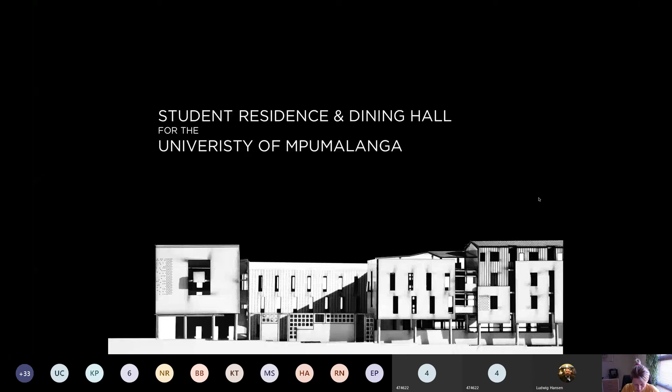Today, however, I'm going to talk about a project that I've been involved with for about 2 years at the office, and it was the design and the implementation of a student residence and dining hall for the University of Mpumalanga at the Mbombela campus in Nelspruit. It required the design of a 200-bed student res and a 700-seater dining hall at the university.

And for those of you who aren't familiar, the University of Mpumalanga is one of two new universities that were opened in South Africa in 2013, if I'm not mistaken, in the only two provinces that did not yet have a university of their own. The other university is Sol Plaatje University in Kimberley in the Northern Cape, and the main campus for the University of Mpumalanga is the Mbombela campus in Nelspruit.

So what you see in front of you is the Urban Design Framework Plan. Ludwig Hansen Architects and Urban Designers was appointed, amongst other things, to design the spatial framework with various implementation strategies to get these universities off the ground. The main campus is made up of a lower campus, a south campus, the hill campus, and an orchard campus.

The first phase of development for the university focused on the lower campus, which has, over a very small span of 6 years, seen the first phase of the university transform what was once the former Lowveld College of Agriculture into a university campus, which provides tuition and living arrangements for more than 2,000 students and is still growing.

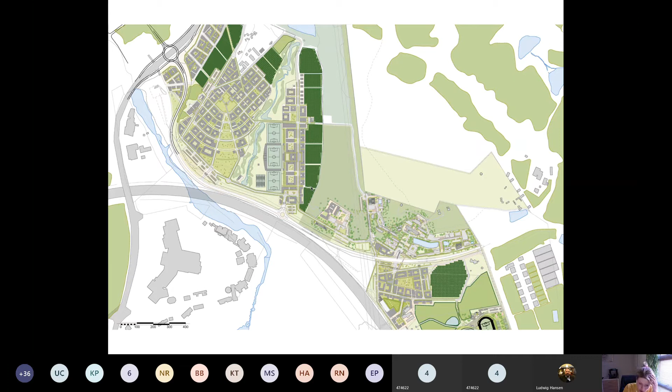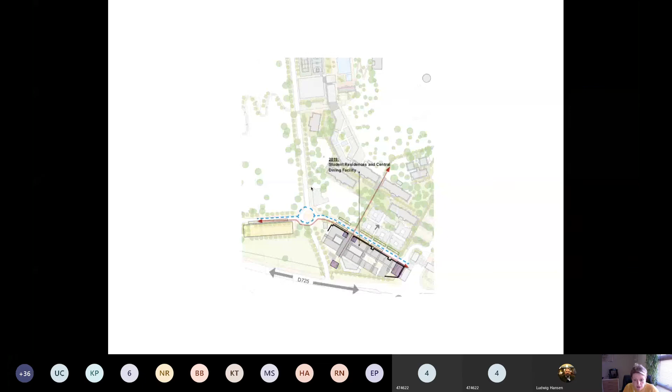The spatial development framework furthermore considers scale, so it works from the macro vision plan, which is the larger vision that spans over a much longer period of time, down to the meso, which considers the relationship that each proposed building will have with the greater campus and the open space in between. It also considers the micro considerations, the material palette and the type of brick to be used, and even the mortar joints that this brick needs to be bedded in. So I was really excited about being able to design a building into a framework like that.

The spatial development framework ultimately set the scene for us to consider what the purpose is of this building beyond the functional requirements of the brief as a student residence and a dining hall. If you think of a university campus as a small functioning city in its own right, every type of building has its part to play. The student res and the dining hall fulfills a vital part of this city-like structure. It becomes a home away from home for students embarking on their studies for a number of years. It is the space where living, informal learning, and socializing will take place outside of the formal academic program.

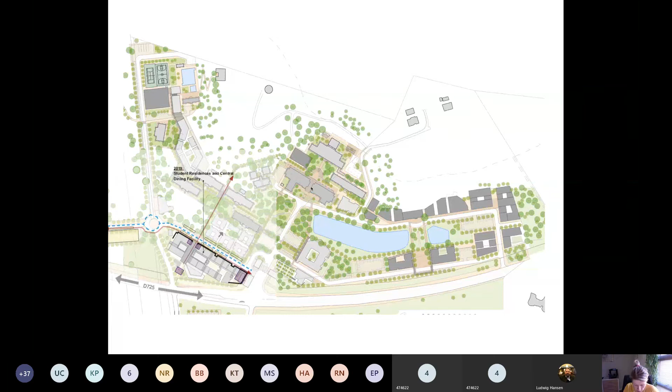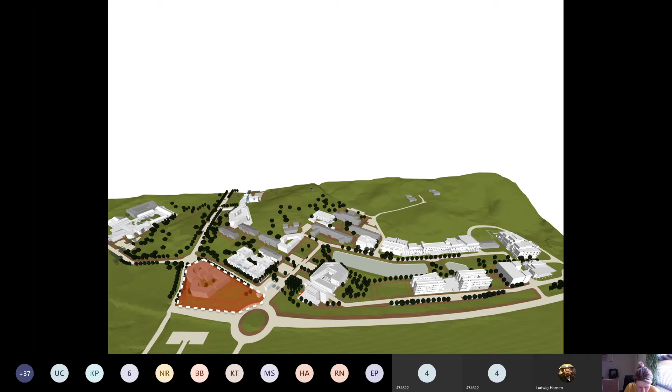This human element of the building was a really exciting prospect for me, and we worked with it a lot in developing the building. So this understanding of the social obligations of the type of building that had to be made ultimately became one of the key influences for the design of the student res and dining hall. We set out to design a building that was focused around creating as much communal and social space that could enhance the campus life as possible, which sounds like quite a public building.

But if you think about it, your bedroom, your bathroom, and your eating arrangements are some of the most private and intimate spaces you occupy. So essentially, we set out to design a building that is made up of mostly private program with an intent to foster the best possible public space. This, from the onset of the project, raised an awareness around the importance of thresholds and the gradation of access from public to private.

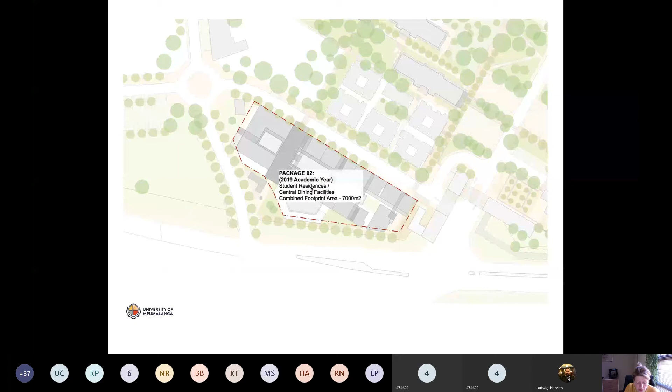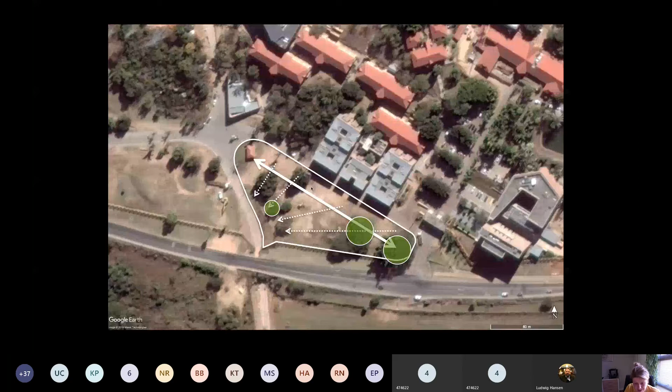So looking again at the site, just practically, there were several challenges and considerations around the site. It was a vacant site, but the first was the elongated shape of the land parcel, being just over 150 meters long, which is quite a long piece of land. Secondly, the fall of the land, which ran perpendicular to the length of the site. And there were a number of beautiful and well-established protected tree species on site that we had to retain. And this significantly reduced the development footprints on site and how we could lay out the building.

The site was very much exposed and has a strong visual presence along the D725, which is this road curling on the southern edge of the site, and the N4 further south, as well as a 40-meter road reserve, which delineated the limitations of construction of the building. So these were all the almost givens when we arrived with the site and the brief.

As I've mentioned before, it's located west of the main university entrance, which sits on the east, with the Vice-Chancellor's offices just across the road from that. So it's quite a prominent building on the university facade. And on the northern edge was a main internal campus road that connects the lower campus to the Hill campus on the west, and across the road is a very established university residence designed by Cohen and Garson architects.

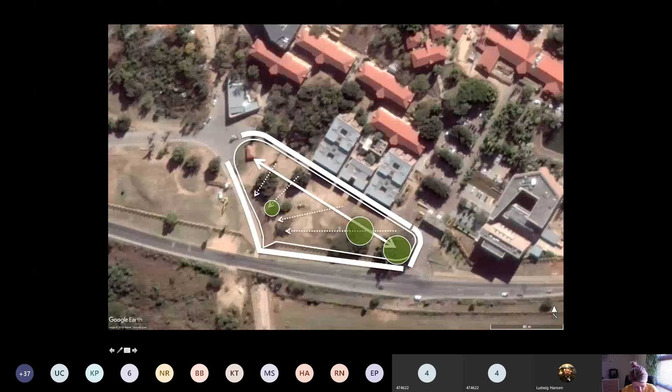So essentially, the building would not be afforded a backside. Here you can see the aerial view of the site while it was used as a contractor's yard, and you can take note of the entrance to the campus, the VC's office.

The topography already becomes quite clear, and the established trees on site you can take note of, which is something wonderful and quite unique about the campus in Nelspruit: it has a very lush and green natural environment.

So speaking to some of the thinking behind the lecture series, just to speak a bit about the design methodology, we decided to treat the site as a mass from which we would carve out a building. The solid would contain the functional program, and the void would eventually contain the social program. First, we responded to the urban axis lines as guided by the urban design framework. And then we split the elongated mass of the site into smaller, more manageable blocks for development.

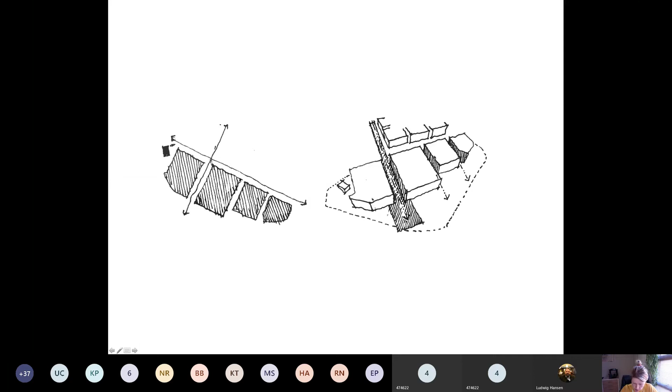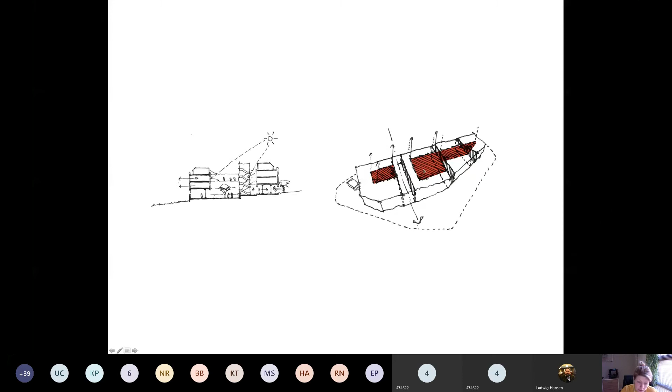We then functionally had to reduce these massing blocks into more slender perimeter floor plates that can accommodate the functional planning of a student res and a room arrangement, as well as providing adequate sunlight to all the rooms. By doing this, we created several courtyard voids that varied in intimacy and scale.

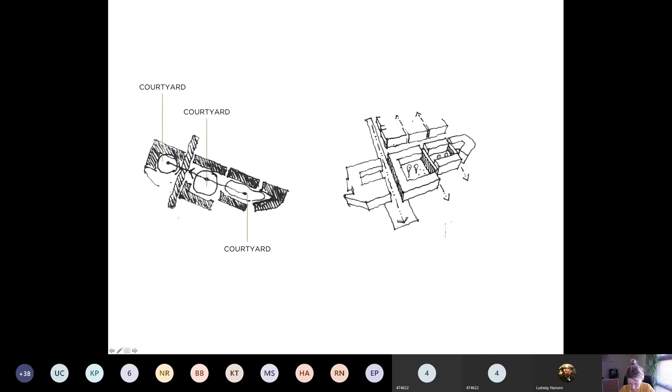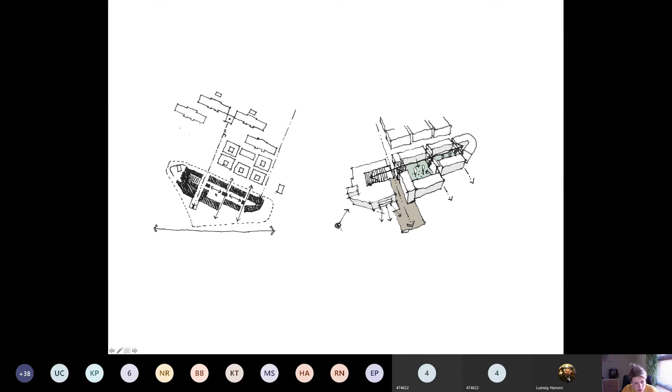So at this point already, we've taken what is a very simple building mass and we've used it as a threshold to the larger campus where open space becomes more contained. The perimeter blocks overlook the courtyards and the campus streets, and this improves the visibility and security of these open spaces that we created.

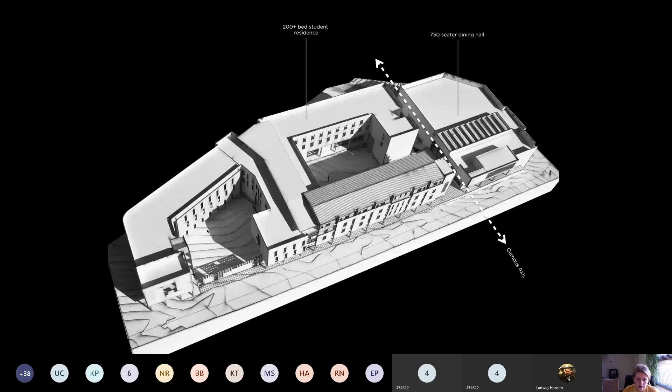So to the one side of the building lies an object-like mass, and this facilitated the most public program of the development, the student dining hall. And on the opposite side of this main urban or campus axis, we placed the student residence. The separation of the two programs was intentionally done, and the connection of all these spaces was done with a visual axis that links the building from east to west. So there's the dining hall, and this would be the student res component.

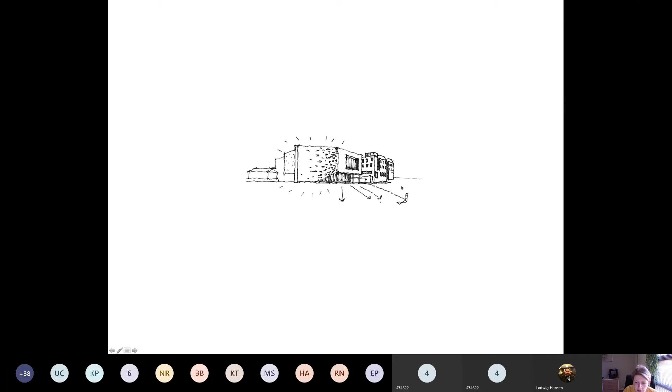In response to the vehicular movement that we saw earlier on the D725 road, the dining hall envelope responded with a singular gesture to create a building landmark. It's almost the first impression from a distance for vehicles approaching the campus. And thankfully, the inherent nature of the dining hall could accommodate single strong gestures. It had more freedom, unlike the rigor that you require functionally from that of a student res. So this is just at the onset of the project what we started imagining the space to be able to look like.

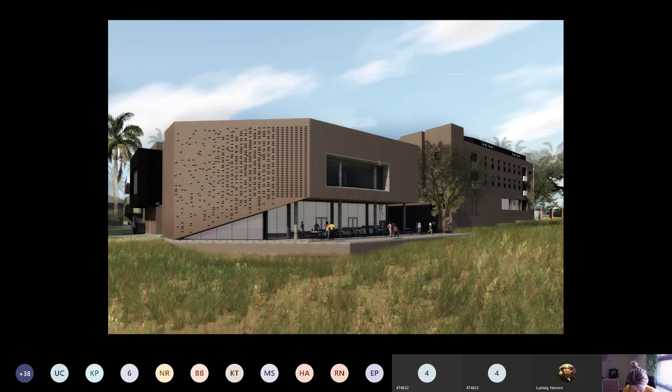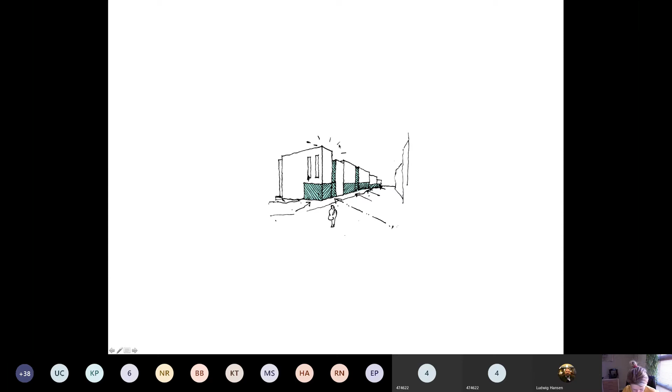And then on the inside northern internal edge of the campus, the building envelope responds more so to the pedestrian scale. It was intended to greet students and pedestrians on the ground level, while landmark features and corners respond to guidelines from the spatial development framework. Again, just starting to visualize what we had in mind at the onset of the project.

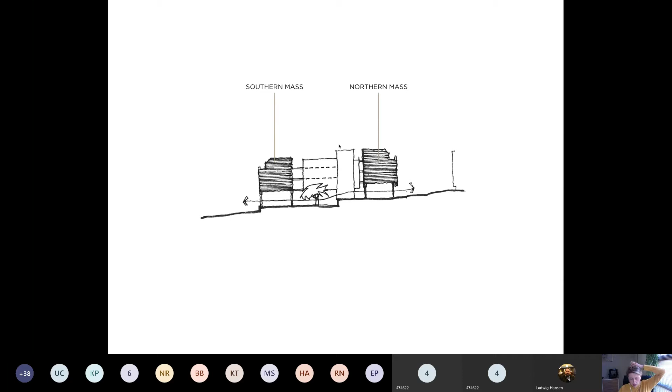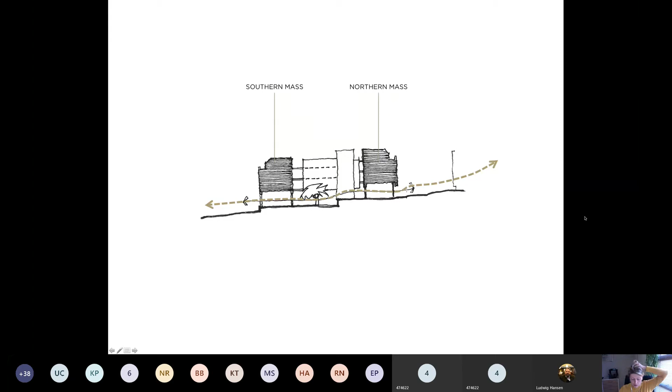Referring back again to the topography of the site and most of the sites on this campus, both the northern and the southern mass of the building was designed to be porous on the ground plane. The intention of that was to create a heightened pedestrian experience and create a raised awareness of the fall of the site. So it is a distinct feature of the hill topography of UMP, and instead of obstructing that and blocking it off, we wanted to really emphasize it.

Similarly, the mass, as you can see, of the dining hall was designed to have a transparency as well, from the internal street edge of the campus straight through the building to a framed view box to the view of Nelspruit.

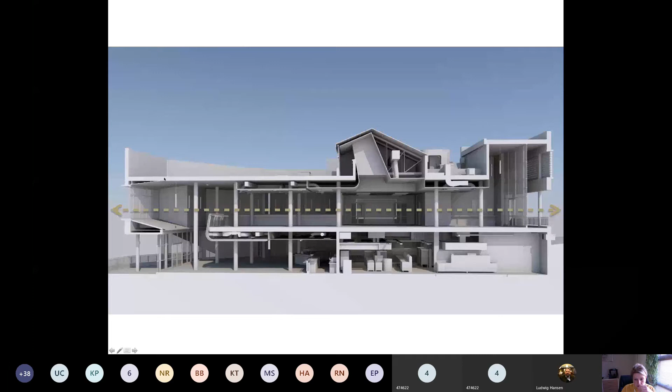So moving from massing to planning, the intention of the ground floor plan was to, as far as possible, locate all programs of shared or public nature on the ground floor, in such a way that it would bleed easily into the new courtyard spaces that we were proposing and the larger campus landscape. So this would include formal study spaces, as you can see on the northern edge, communal laundry rooms, and student lounges and breakout areas, to really create an almost unobstructed flow from internal space to external space, from public to semi-public to private.

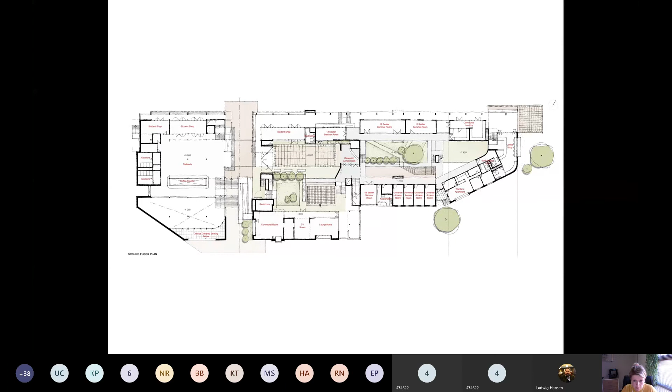And that was the intention from the onset of the project in terms of planning. The building elevation had to respond to the functional requirements of the student bedrooms, which created a lot of vertical articulation of the facade, which was intended to break what was essentially, as I said, collectively a 150 meter long elevation with the student res.

The depth of the facade, as well as the material difference, attempted to manage the scale of the building in the greater campus landscape. And the existing Marula tree that we had to retain actually became a celebrated landscape element that was cradled by the building and provided a softening element to the elevation and to the rigor that comes with planning a student res with the repetitive windows and the functional requirements of the space. So it also provided somewhat of a natural curtain to the rooms that surround the courtyard.

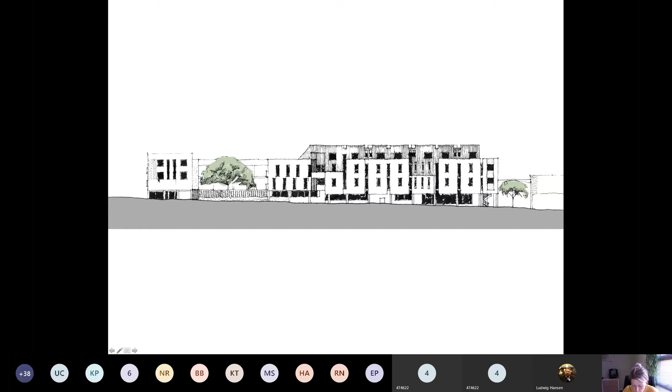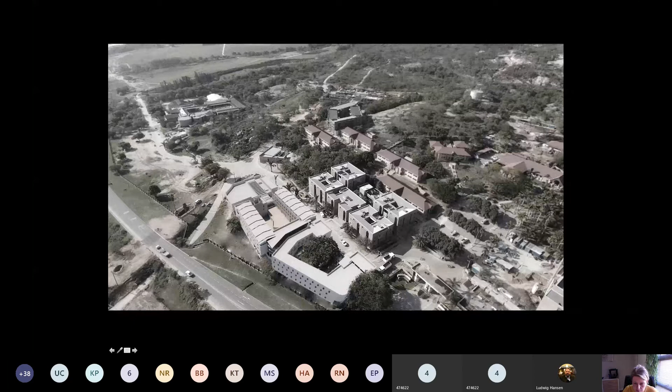Throughout the design process, we had to test the massing in relation to the campus fabric to see that it sits comfortably and it actually fits in.

And this is followed by a large courtyard which separates the campus public from students in the residence by means of a curved landscape wall and a change in level. I'll speak a bit more to that later, but this really becomes the forecourt to either entering the dining hall or the student residence.

This is where, yes? Sorry to interrupt. Just a question about this. So is this then the entrance to the campus as well? No, it's just the entrance into the building, not the campus. It's just the entrance into the building precinct. So once you're in the campus, it's a good question.

Students are encouraged to move freely throughout the campus, and it's then up to the buildings and the schemes themselves to filter students from public to private and to allow them in and out where they are allowed to be. So the dining hall should be used by students on a daily basis and should therefore be very accessible and quite public. And I say public in inverted commas because it's not truly public, it's public to the life of the campus. So once you are on campus, this is how you would enter.

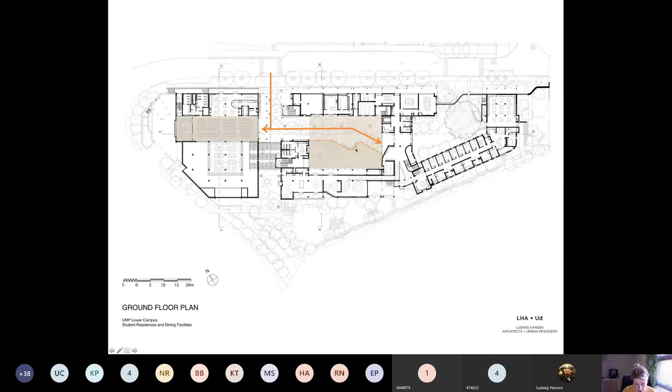And yeah, so the second courtyard becomes the forecourt to the main entrance of the student res. And this courtyard space is divided by means of a curved landscape wall, which separates the public space from the semi-private courtyard, which is only accessible by students in the res. All communal services are located around this courtyard. We've got provision for a bookshop, laundry rooms and drying rooms.

We've got seminar rooms that look out visually into the space. And on the southern edge, we've got all the student games rooms, TV rooms, and lounges also spilling out onto this courtyard space to really make it an active edge and an active open space. So when you move through the foyer of the residence, you come through into the Marula Courtyard, which is a soft courtyard and the most private court of the building, which is reserved for students who reside in the residence.

The Marula Courtyard is surrounded by a series of universal access rooms for students with physical impairments or disabilities, a large study space, and access to the warden's apartment, who oversees and looks after the students in the res. So the arrangement of the open space can be seen almost as one extended threshold that gradually filters the students from public to private.

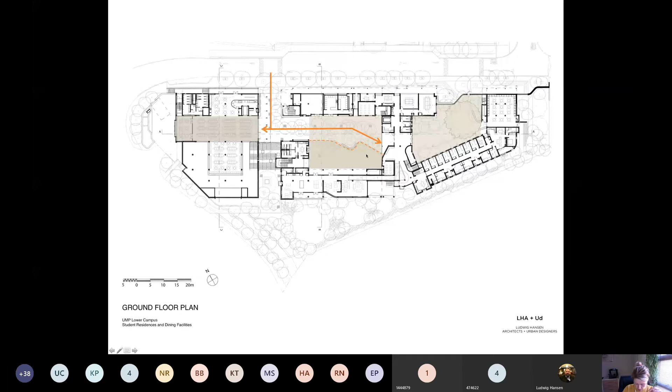Elements such as built-in benches, landscape benches, shelter from the harsh sun, which is a big thing in Nelspruit, and rain, as well as drinking fountains, are all placed in these areas to encourage students to gather outside and linger together.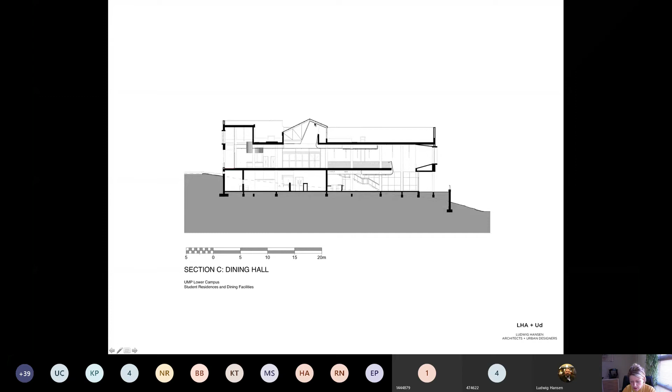And you also get an idea, because of the deep floor plates, we had to introduce a skylight that could bring in soft dappled light into the dining area. So some of the photos are still construction photos, some of them are more final photos, but they get the idea across. Here you can see once you enter into the dining hall, how you still get a strong sense of the axis line that moves east-west.

It terminates with an outside eating area that has a growing wall with a screen for planting to take on, as well as a skylight that filters the light quite softly into the space. On the north-south axis, the building's quite transparent, so you also, again, get a good appreciation and connectivity with the Nelspruit landscape and the campus landscape.

The outside eating area with the screening device, where we've included planting to grow up, because there was a small window in the afternoon where the afternoon sun would really pull in deeply into the building. So as this grows over, the space will become softer and you would feel more outside than as is now. This is looking back towards the student res.

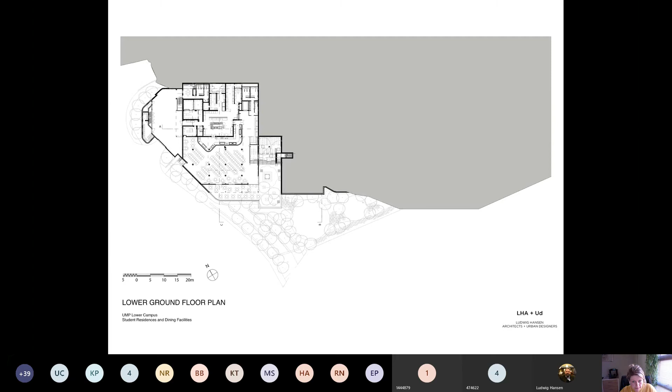So it's a heavily serviced kitchen that needs to contain refrigeration rooms, freezer rooms, fresh storage rooms, a service yard to access, weigh and clean all that material, and all of that needs to flow seamlessly through a kitchen that can then prepare and serve the students on the lower ground floor level. So looking out from the serving area out to where the students would sit down below.

And just to get an idea of how heavily serviced the back of house functioning is of a building of this nature, there's a lot of planning that goes into designing a kitchen that can cater for a single seating of 600 to 700 students at a time. Here you can see what the serving areas look like.

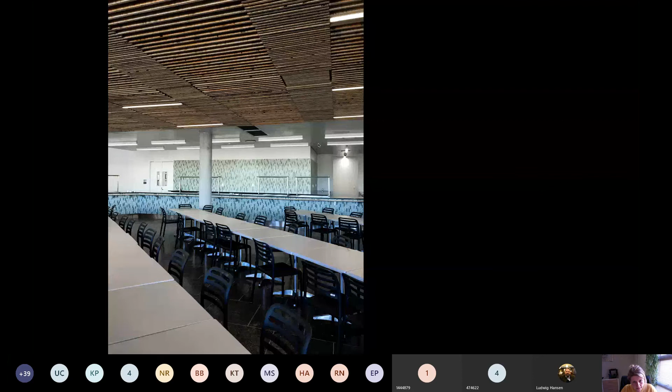And then looking at the external elevation of the building, the western elevation in the dining hall as a whole has much more of a sculptural envelope, and the western edge specifically has a sculptural edge which really brings to front the beauty that shadows and lines can create with the brickwork.

So it really gives you an opportunity to start playing with brickwork and walls and curvatures in such a way that you can appreciate the time of day and the vivid light that is inherent to the Nelspruit landscape.

So when you move back up to the main courtyard space from the lower ground level, you start to get more of a feel of the building material palette. The building material palettes for this building and all of the other buildings on campus are guided by a standard campus specification, which is set forward by the SDF.

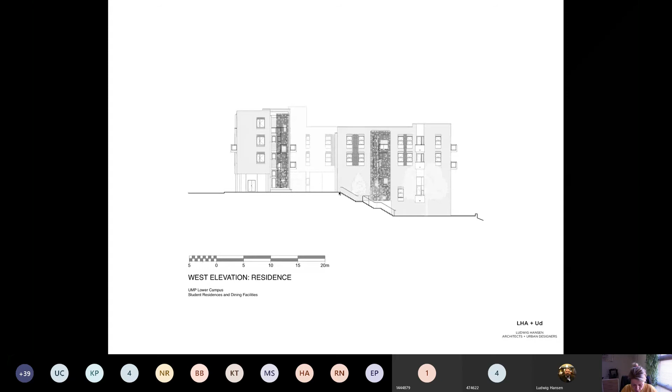And in this image, you can see the fire escape staircases we wrapped in a concrete breeze block with various opening sizes. So the way that we assign the materials to the building also becomes almost like a manageability map to the building. And it introduces a slightly more playful element to have you through these picture boxes almost.

So as you move down the axis, you move into the second courtyard. The second courtyard is the largest courtyard that you need to actually walk through to get to the main entrance of the residence building. So this was consciously done to improve the active nature of the space.

And here you can see how we've used the landscape as a structuring device to create a threshold that's a bit more subtle and gentle than just a wall or a palisade fence or a building, to separate students who reside in the res from students who are outside the res. So you can see the open nature of the ground floor plane in the main courtyard. Instead of using a solid high wall to separate the public space from the semi-private space, the change in landscape helped us in this way. It provided an opportunity to create a less imposing boundary.

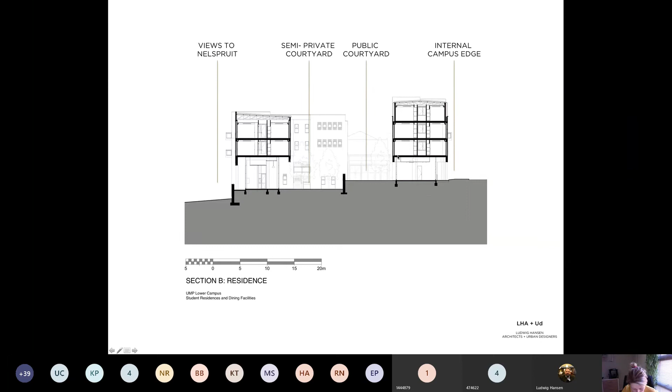The idea here is to create a courtyard that is an active open space where students from other residences and the broader campus can meet with students from this residence outside the confines of the rooms or the process of having to check in and sign in, and it really just becomes a spontaneous place where you can still meet and talk across a very open boundary.

The wall itself is quite low, especially from the approach of the building. And again, looking at how every element of this large structure has been designed to accommodate students or people at a pedestrian scale, the way that the wall turns into seating and it curves gently to soften the edge of the kind of large scale residence facade behind.

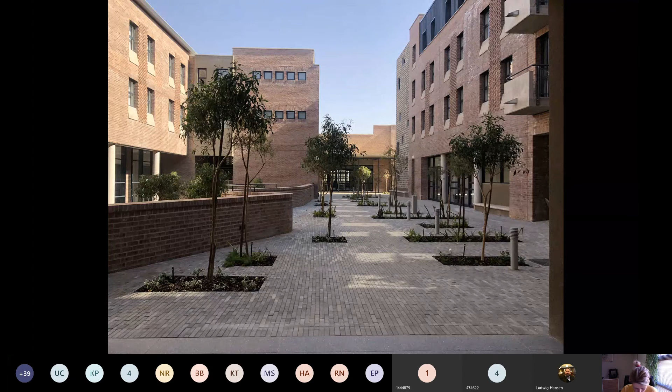So this is looking back and really getting a feel of the scale of the courtyard and how it's contained by the residences on either side, with the dining hall in the distance. So the spaces that open up onto this courtyard contain the social program for the residents. As I spoke earlier, you've got games rooms that open up onto this. You've got more enclosed TV lounges.

So while this is all in a shared open space, we used elements such as joinery to almost create a space within a space that, again, filters from public to private, to what are more quiet sitting rooms where you can meet with family or talk to friends, and all these spaces spill out onto the lower courtyard plane, which has a lawned area for students to sit and read a book. And then this is again looking back at the higher area where you've got bookshops and laundry areas on the more public area of this courtyard. This is what it looks like from below.

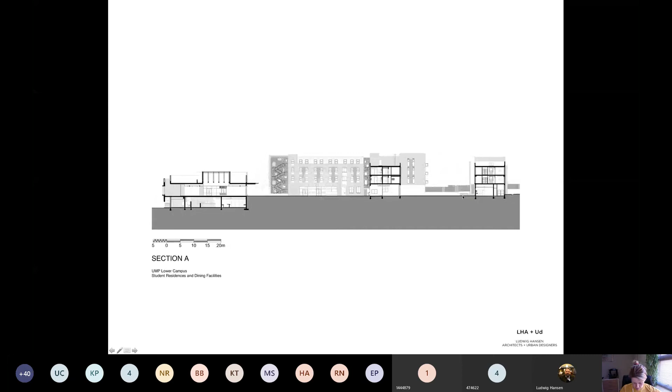So we've currently just been in this space, and if you look at the building along an east-west section, you get a much better idea of how the various open spaces are linked together through a visual open axis. Open space 1 being the dining hall, open space 2 being a combination of public and semi-private courtyard, and open space 3, which we'll get through now. Open space 3 is the most private of the 3 courtyards.

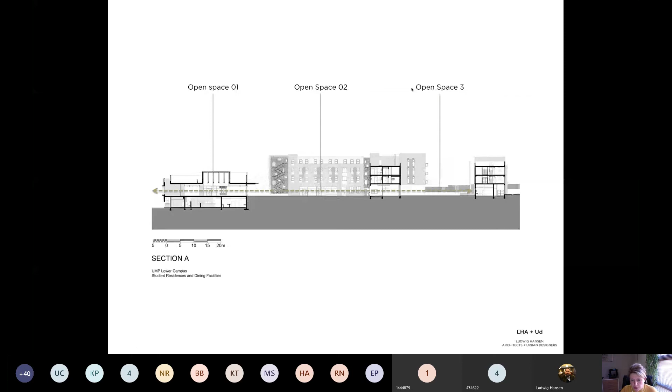And in order to get there, you have to move into the foyer of the student residence building. The face brick material is carried through to the interior here into the foyer. You can decide whether you want to move up to your room, whether you want to go to the study space, which is located behind us, and seminar rooms, to the right, down the ramp to the lower ground communal shared social spaces, or if you move through the courtyard, you move into the most private of the courts, which is the Marula Courtyard.

The Marula Courtyard is slightly more intimate in its scale, and the landscaping was designed to be a softer space where you can get away and have a moment to yourself. The beauty of this courtyard is really that it's ever changing with the seasons. So the view from your room and the quality of light will change throughout the year. And while this courtyard sits right at the edge of the university entrance, the presence of the tree provides a sense of calm that you need to take some time off as a student.

Small gestures such as raised beds around the landscaping provide students a place to sit. Again, it's all part of how the building meets the landscape to create a more comfortable pedestrian experience.

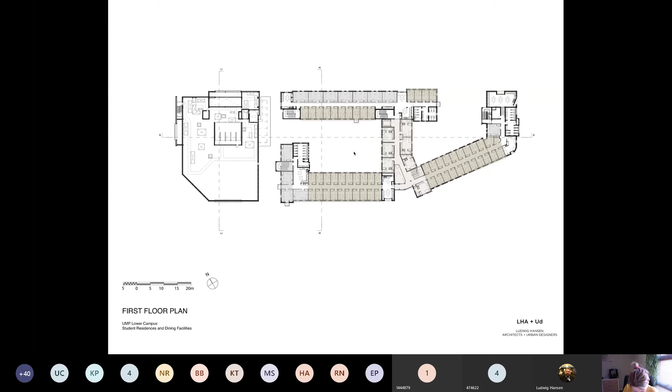So the residence itself is a mixed res, so it's men and women mixed together in one building, but they have to be divided, made up of a series of single rooms, double rooms, self-catering apartments for postgraduate students, high-performing students, or even visiting students and scholars, and universal access rooms, which were located on the ground floor plan. All of the rooms, except for the self-catering rooms, make use of shared ablutions and small kitchenette facilities.

So working out the ratio to accommodate students, it's approximately a 1:4 ratio for ablutions, and looking at creating almost wings that can accommodate students in their various houses, with the self-catering apartments placed consciously in the center as a filtering element. So the main service there of the building, as you come up, you would decide whether you go to what has become the male wing of the building or one of the female wings, which was a 60-40 ratio roughly. And all these self-catering apartments would be seen to go to more senior students.

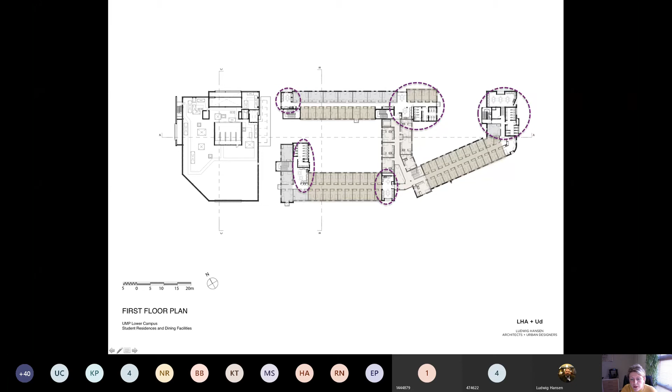Each one of the wings is a level of security or a threshold that you pass through, and mostly you enter through a small kitchenette, which will then take you to your bedroom, whether you are in a single or a double room, with the ablutions further along.

So the small shared kitchenette facilities were designed to provide each student with a lockable cupboard for non-perishable items, as well as a small cooking area for cooking very small and simple meals, making a cup of tea, along with other standard kitchen appliances. The idea behind these spaces was really not for students to prepare full meals in the kitchens, but rather to function as a tea kitchen between studying or taking a break of sorts.

The bedrooms themselves all come furnished. What was interesting about designing a student residence building is the fact that all joinery, all cupboard handles, everything has to be designed with students in mind. So the door handles were designed so students can lock their cupboards and lock away their valuables. The room locks were spec'd to a standard that a student can lock with a padlock, and you can still access the room if you need to get into it.

And then what you see in these rooms is, at the onset of the project, we made a decision, in an attempt to reduce the construction coordination time in casting the services, to provide the bedrooms with these pelmet-like structures. And the pelmet essentially would contain everything a student needs to function in their bedroom. So it would contain the lights, it would have a dropper with a study light in it, it has your plug points, your network cables, and everything you need to operate your computer from your bedroom. And each student then has a dedicated pelmet.

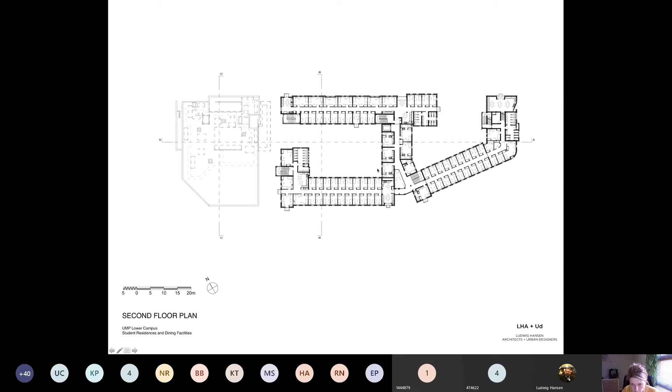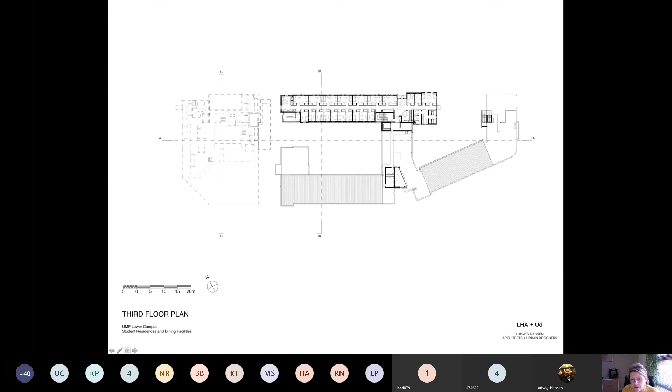And then as you move up to the third floor of the building, you find the top wing, which you'll see in the photographs was slightly higher than the remaining buildings on campus. So we decided to treat this wing with a cladding. We used the clip lock sheeting cladding to break the scale in the elevation line. You'll see that here, so that the building itself doesn't become too high relative to the buildings on campus. The third floor really does step in certain ways to accommodate this clip lock roof sheeting.

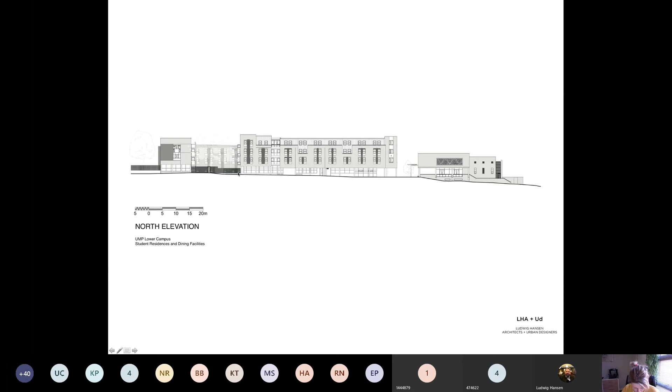So when we look at how the building responds to the internal campus street edge, I spoke briefly about the softening of the Marula Courtyard and almost the porous threshold that gets created by taking on the concrete grill blocks. The ground floor level has a covered pedestrian walkway for students, so as they move along the campus, they are sheltered against the sun or rain. And again, the way that the building and the landscaping becomes a threshold between the larger campus environment and the building itself always has a consideration for the finer details, creating moments where there could always be a bench or a point to stop, providing adequate lighting so students feel safe at night and day.

Speaking personally, I believe the building has been designed in harmony with the spatial development framework. The open spaces have been carved out and have been designed with a matched rigor as the program of the building inside. Through working with the various materials, we attempted to deal with the boundaries and the thresholds between public and private in a more gentle way that is more conducive to people enjoying the social spaces around the building. And ultimately trying to create a building that really responds well to the urban environment, or shall I rather say the larger campus environment, so that students don't feel like the only space they can socialize or enjoy is limited to a classroom or bedroom, but really that the external space around is matched.

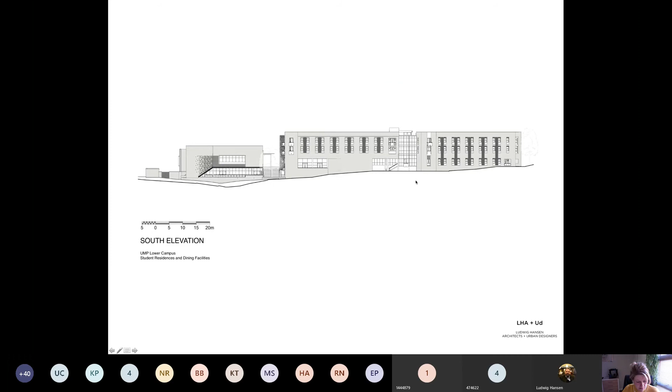Thank you. Thanks, Jess. I think that's fantastic. Well done. And I think that was a very comprehensive analysis of a building and its process. And I would encourage the students to understand methodology and approach from that perspective as well, at least looking at buildings. I'm going to open up the floor for some queries or questions. So by way of raising your hand, I can see people and then you guys can respond.

Enrico. Hi, Jessica. Thank you. I just wanted to ask about the clip lock cladding. It was quite a dark finish. Did that have any impact on the internal climate due to the biome of Mpumalanga being quite a semi-arid area?

If you're referring to the color of the clip lock sheeting, yes. The color we spec'd is dark dolphin. It's a campus-wide spec that we applied. And interestingly enough, there is a pigment built into that shade of clip lock which actually serves almost the same as a white sheeting. Not knowing fully the scientific understanding behind it, it is built into the pigment of the sheet color that it actually reflects the heat instead of absorbing it as you would expect with a dark roof sheeting. In saying that, the darkness of the sheeting climatically didn't have much of an effect on the internal quality of the building. Does that answer your question? Yes, it does. Thank you. Cool.